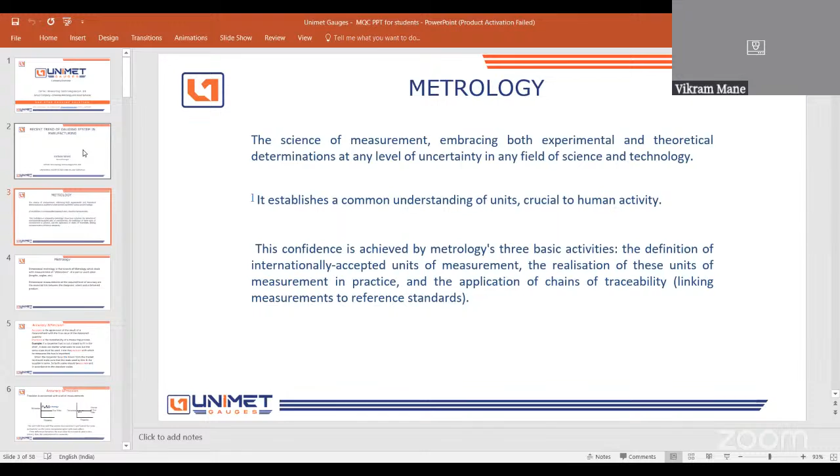Metrology and quality control. Are the students from all faculty, first year to final year, or only second year, third year, final year students audible for this PPT presentation? Because I will explain in that way, whether they are in first year, second year, third year, or final year. Most of the final year students, sir, as well as diploma and degree faculty members are also there. No issue, sir, then everybody knows the metrology science.

Now we are dealing with dimensional metrology, because there are different types of metrology fields, in various fields. That is weather metrology, you can say temperature, pressure gauges, temperature gauges, and other sensor gauges are different. Our company is especially dealing in dimensional metrology and especially in linear measurements.

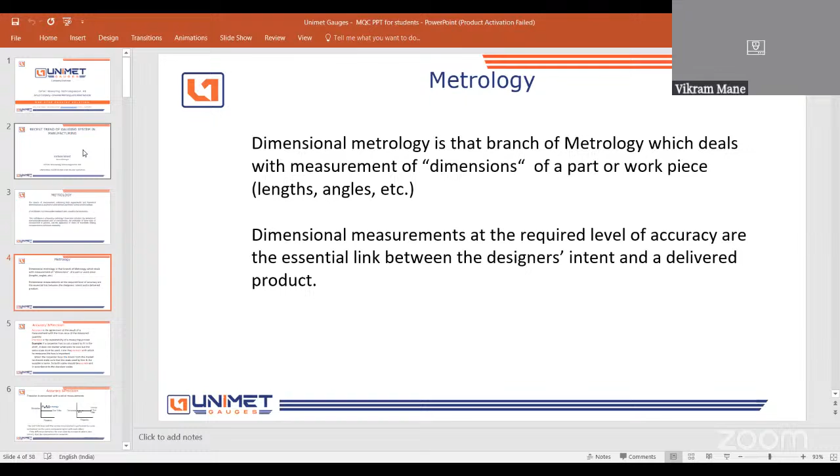Now, if we deal with metrology science, we come to the actual definition of accuracy and precision. These are basic definitions. Accuracy is the agreement of the result of a measurement with the true value of the measured quantity. And precision is the repeatability of a measuring process.

What is accuracy? What is precision? We come across precision manufacturing components everywhere. All companies write on their boards or in their company names that they do precision component manufacturing. So what is precision and what is accuracy?

There is a slight difference, and we should know the basic things. Accuracy is nothing but the agreement of the result of measurement with the true value of the measured quantity. Precision is nothing but the repeatability of the measuring process, meaning repeatability of gauges, measuring scales, verniers, or micrometers. That is called precision. Accuracy is some value along with agreements which are accepted worldwide.

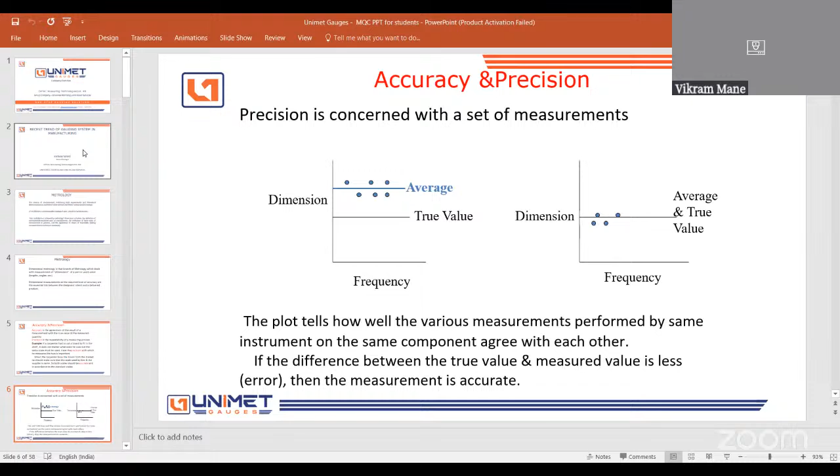Now you have to define which instrument gives you precision values, and whether repeatability is good for that instrument or gauging device, such as your scale or vernier calipers. You have to take that call for your instrument or measuring process.

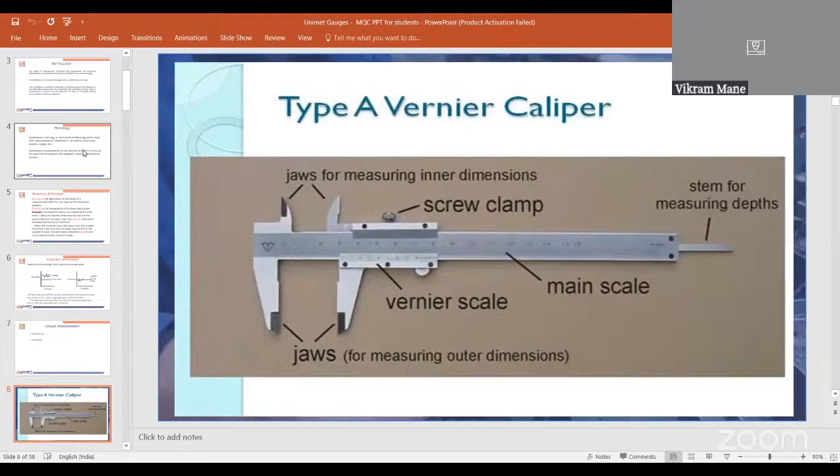These are the basic tools. We are all familiar with the vernier caliper and micrometers for linear measurements. I have included diagrams here which we are all familiar with.

From these conventional gauges, vernier calipers and micrometers, for mass production or batch production, to avoid long checking cycle times and minimize inspection time, some gauges were introduced in the quality control or inspection department. These are correlated with the first principle gauges, that is the vernier caliper, micrometer, and height gauges.

Through correlation with these conventional gauges, other types of gauges were designed, such as go gauges, no-go gauges, plain gauges, and thread plug gauges. These are the different types of gauges, and I have shown pictures here.

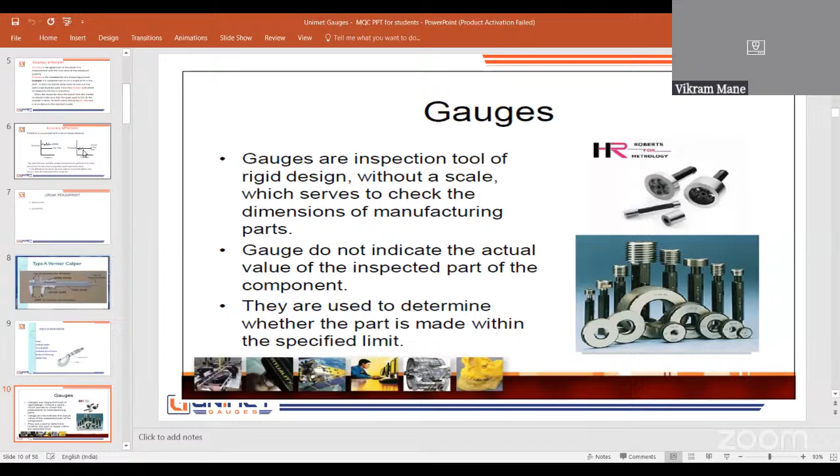That is the plain plug gauge. Here there are two pictures: one is the plain plug gauge, and the other is the snap and ring gauge. Through these gauges, you can handle inspection for mass production as well as job production up to tolerances of about 10 to 50 microns.

Maybe above 20 microns, because for broad tolerances—20 to 50 microns and more—you can use such plain plug gauges and snap gauges. You cannot observe any readings here; one end is the go side and the other is the no-go side. These are the conventional gauges.

This is the tolerance incorporated for the go and no-go gauges. There are unilateral as well as bilateral tolerances. Unilateral, which you are already familiar with, is only on one side, while bilateral means tolerances are applied on both sides of the gauge.

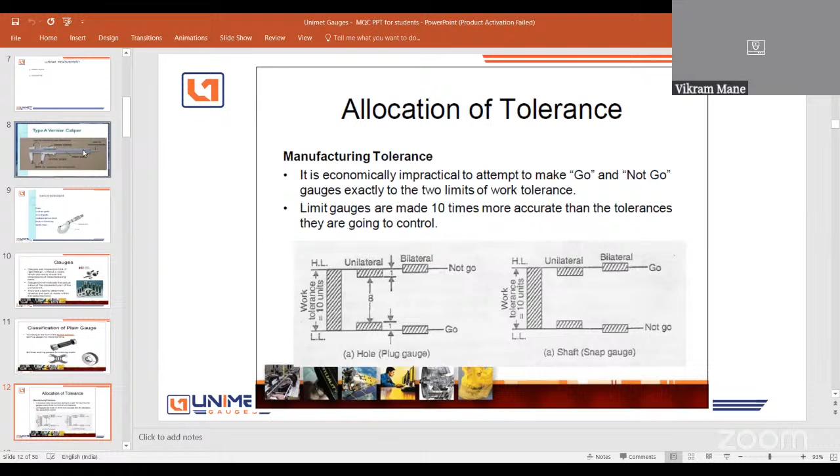Now let's come to some advanced techniques introduced over the last 25 years or so: air gauges. How does an air gauge work? It is a non-contact type of measuring method, introduced in the market more than 80 years ago, but in India we have been using it only for the last 25 to 30 years.

This concept of air gauging is based on the law of physics stating that flow and pressure are directly proportional to clearance and react inversely to each other. The measurement values appear on the dial gauge, either in analog or digital form, based on this physics: the fluid or air flow is directly proportional to the pressure and its clearance.

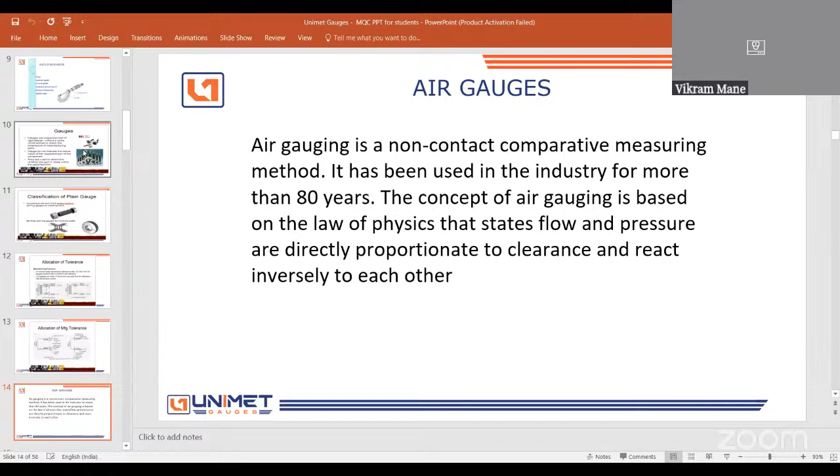Again there is clearance provided. That clearance is near about 20 to 30 microns, as per the different design parameters from different companies.

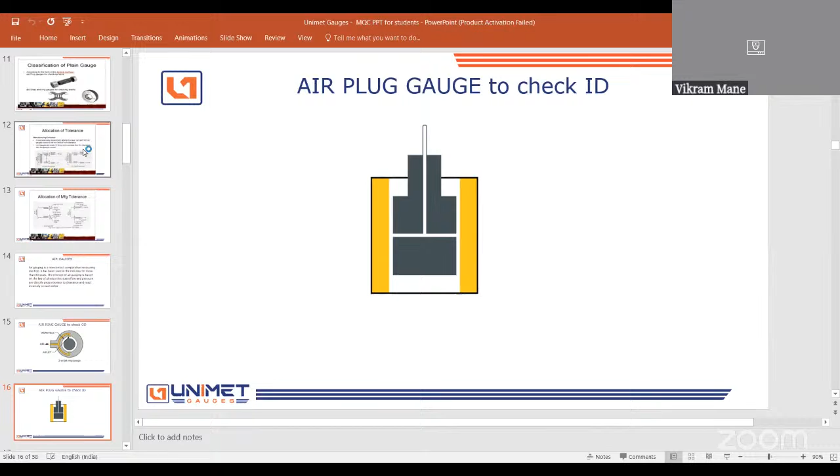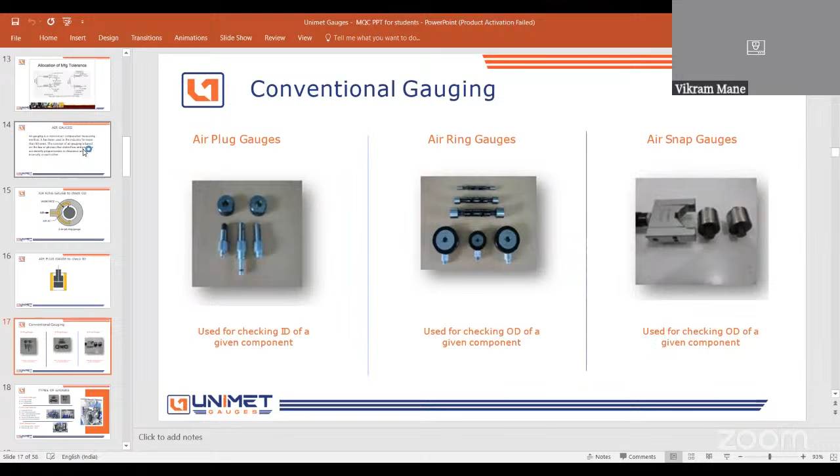Now this is the actual picture of the gauges - air plug gauges, then air ring gauges and air snap gauges. With these air plug gauges you can measure the ID. You can measure the OD through these air ring gauges, and again you can measure the outer diameter of the shaft through these air snap gauges.

Now these are the different types of gauges, from the conventional gauging systems, customized solutions, and latest development. Here we have already seen these conventional gauges - air ring gauges, air plug gauges, air snap gauges.

Now come to the customized solution. For the customized solution, there is again need of this Industry 4.0. For gauging fixtures, we have to design multi-gauging systems so you can measure multiple parameters in one single system. Again, there is semi-auto gauging, meaning loading and unloading by manual process or maybe through gantry or robot. Again, auto gauging, loading and unloading through robots and gantry.

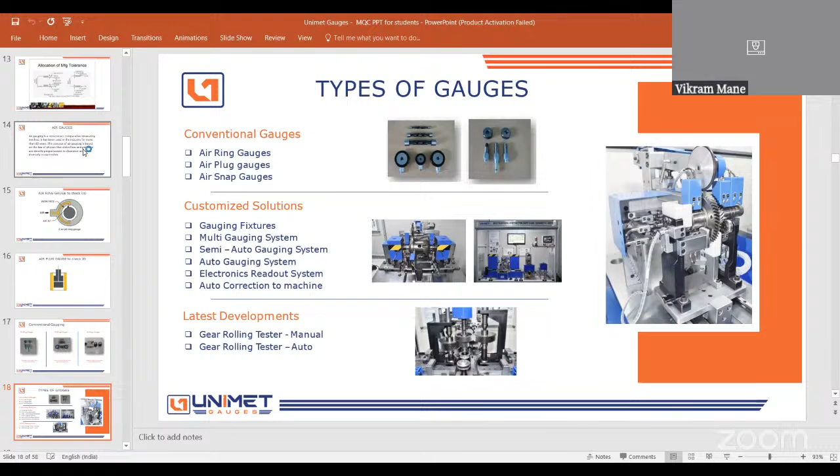And there are some electronic readout systems, then auto correction to machines also. And the development in the recent trend is again GRT, that is the gear roll testers. Maybe manual and auto gear roll testers are there to check the profile of the gear teeth.

Now, each and every problem creates some revolution in the global society, or maybe as per the need of the manufacturing market. Due to this main problem of the manpower, that skilled manpower, and to cut the cost of the manpower, this revolution comes into the picture across the whole world.

And we, being the dream of our Prime Minister, Sri Mr. Modi sir, this Industry 4.0 is now going to be compulsory for each and every manufacturer. Unless and until any manufacturer doesn't have the facility of this Industry 4.0, they are not considered for the global platform. That is why India is going to become a manufacturer hub, auto manufacturer hub for the whole world.

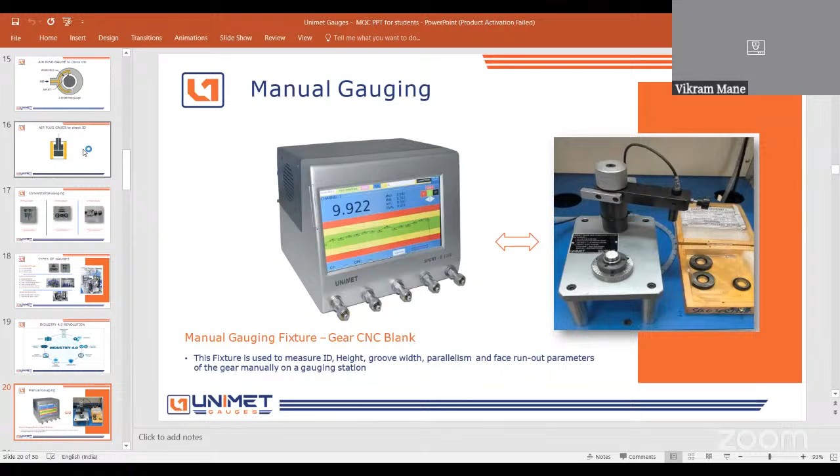Just a minute, sir. If you press shift and F5, it will get full screen, sir. One second, sir. Okay, yeah, it's fine, sir. Okay, thank you, sir.

Now comes to this gauging field again. Up till now we have gone through these conventional gauges, that is the go gauge, no-go gauge, air plug gauge, along with analog or dial type gauges.

Now comes the electronic type of gauging units. These units along with one gauging fixture are there. This is one simple example of Industry 4.0.

Now these units here, you will get the SPC. This unit is based on the SPC software. Again, you will get the real-time data of this gauging data on this unit.

There are three bands: green, yellow, and red. If your production is going on within the tolerance band, there are different settings. Suppose plus or minus 10 micron is your tolerance, if you want to set your green band, that is within 5 plus or minus micron band.

Now, if you check in components, these 4-5 ports are for air or maybe for contact type inputs. This is the 5-channel unit, 5 input unit. Here, if that production is within tolerance of 5 microns plus or minus, it will reflect this graph.

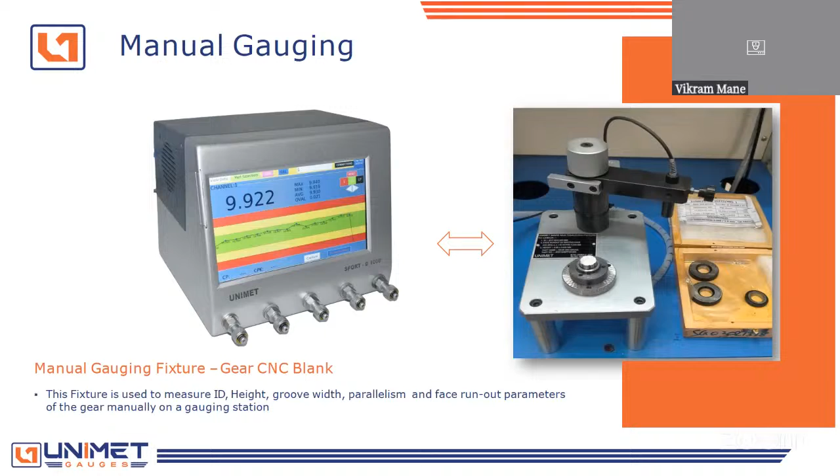Now this is the second type of unit. As compared to cost, it is an economical cost solution for the manufacturers.

This is the microprocessor based unit. This shows the gauging value through this digital readout unit.

If the values are within tolerance limit, you will get the green reading, and if the measuring values are more than the tolerance values, then you will get the red - red digital digits. Here there is a facility for green and red digit readings.

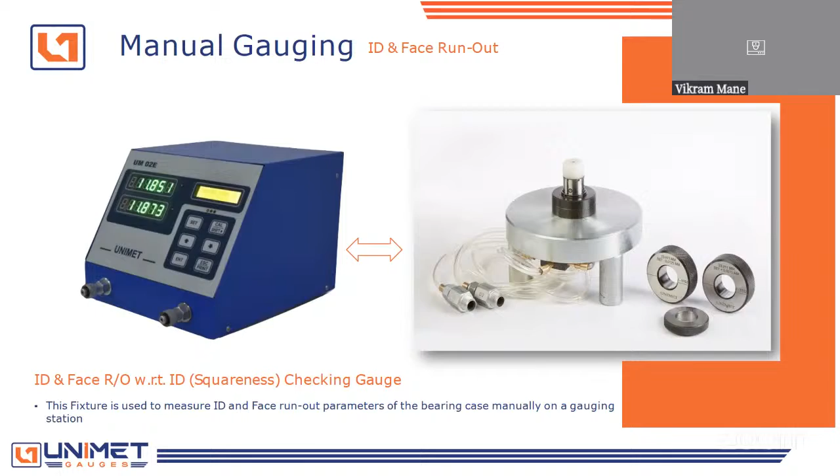Now after these simple digital solutions, you come to the advanced types of gauging systems, that is multi-gauging and auto gauging systems. Now what is multi-gauging?

You can check 2, 3, 4, 5 up to 40 or 50, up to 100 parameters or dimensions at one time. More than 2 parameters in multi-gauging you can cover within a single stroke, and within 50 to 55 seconds you can check all these 100 parameters or 50 parameters.

You can save the time for inspection, around 1/10 - 10 times manual time you can save through these machines, and you can save 10 persons through one gauging machine. This is the real benefit of the machines.

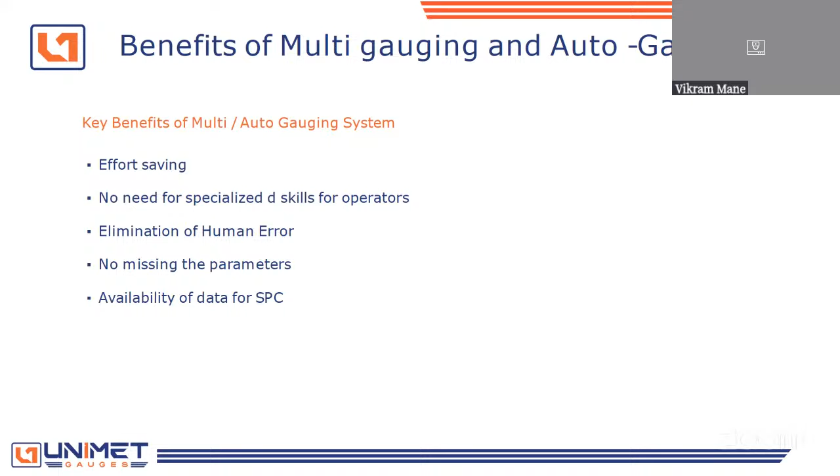Then elimination of human error - the machine always tells the truth, and you cannot miss any parameters. All this data, these machines save at the server or in the computer or CPU. All the gauging data you will get per shift, or as per the number of components checked per shift or per day.

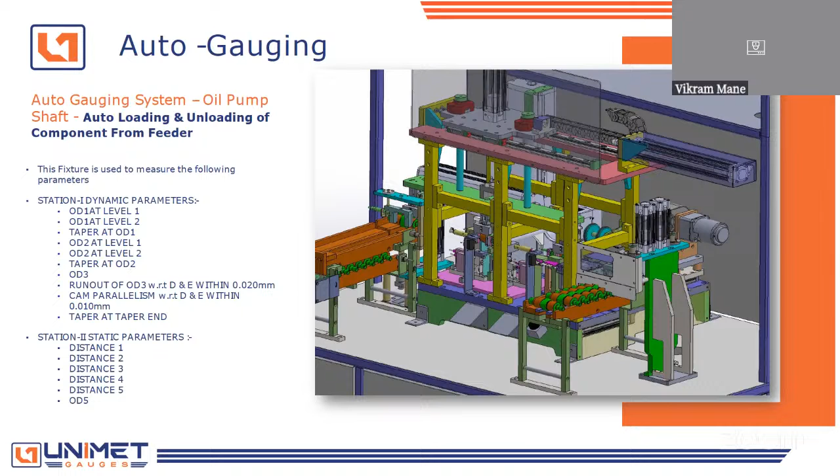Now this is the layout of some gauging machines. This machine is made to measure the oil pump shaft dimensions. If you observe, you can measure near about 18 to 20 parameters in a single stroke. This is the actual machine.

I will show the videos of this after completion of this presentation. The oil pump shafts move on this base conveyor, then go to gauging stations, and all the parameters are recorded and stored in the computer, showing readings of whether it is okay or not. This is the actual machine again for the oil pump shaft.

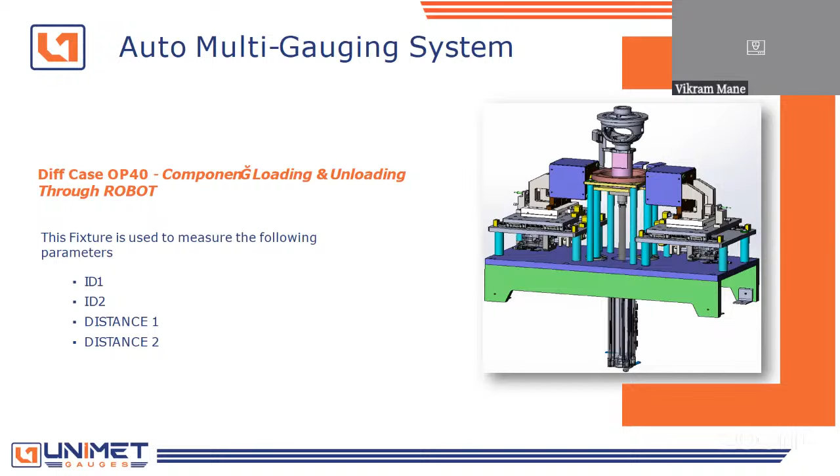This is the second component, the differential case, or differential cage you can say. Here you can measure the ID of both levels and distances of the different levels with respect to its bottom. This is the actual machine.

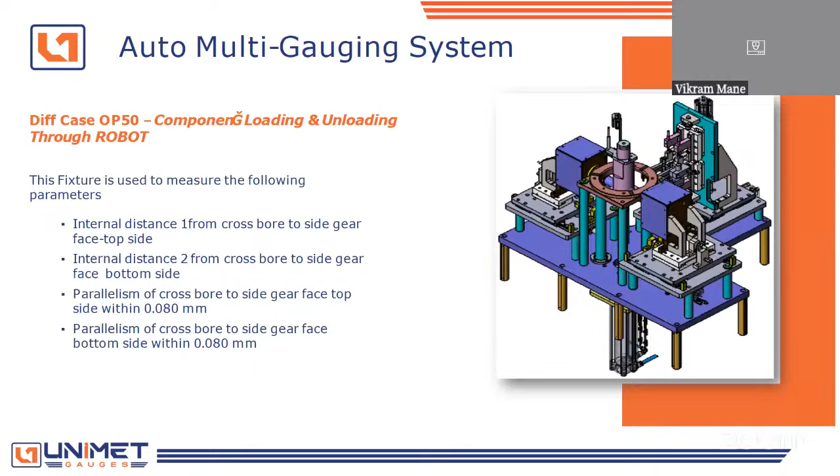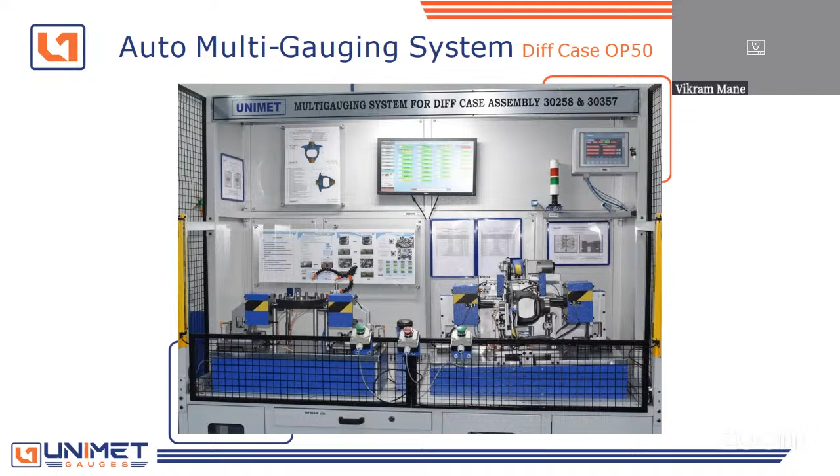Again, this is the differential case multi-gauging system. This is the horizontal type fixture; earlier it was vertical type. Now you will get the computer screen here, gauging fixture.

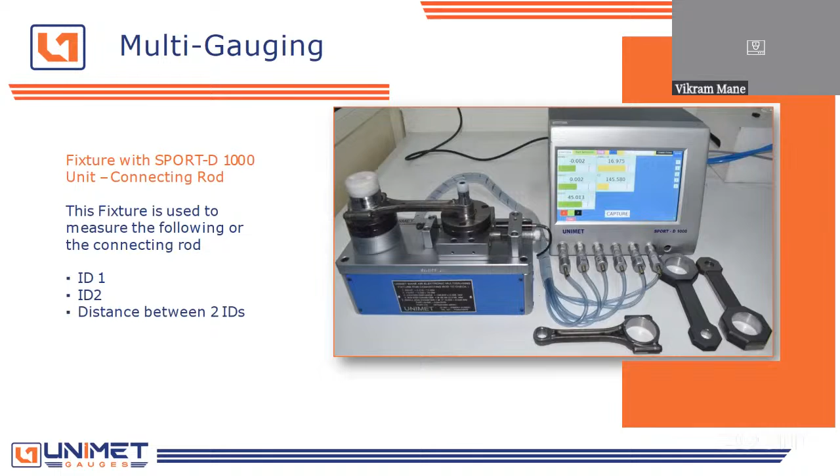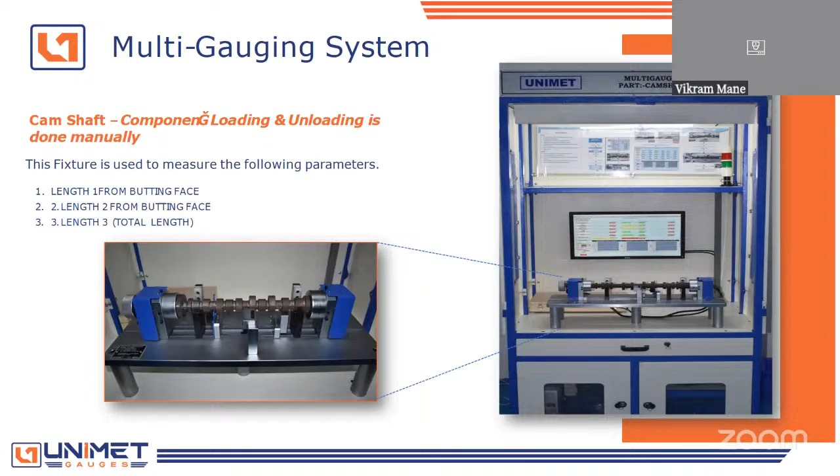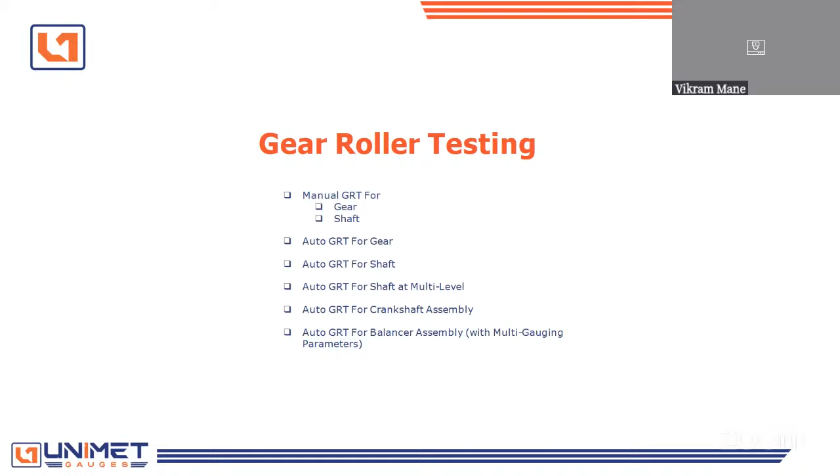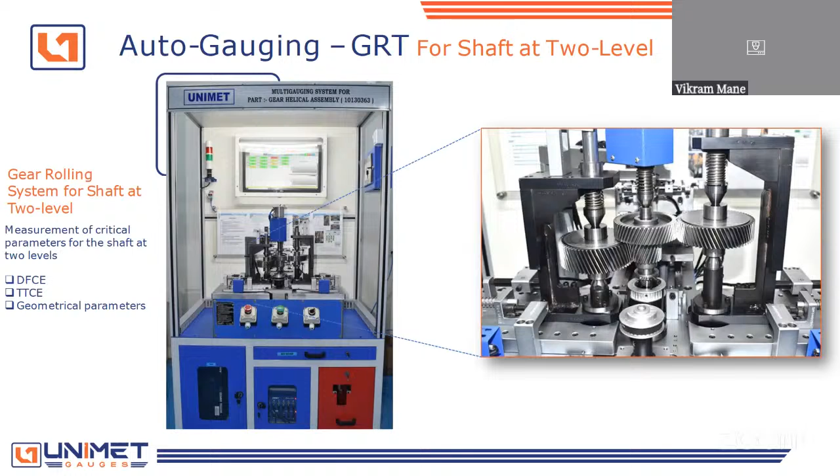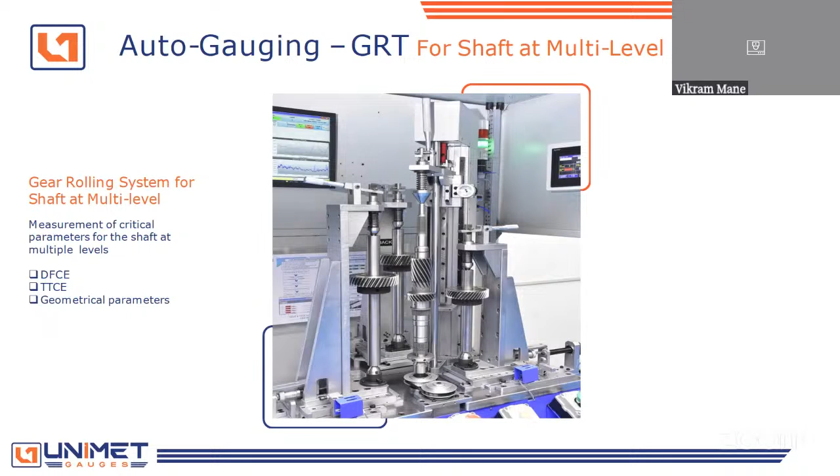Now these are the gear roller testers to check the gear parameters, that is DFCE, TTCE - double flank composite error, tooth to tooth error, composite error. Now this is the auto GRT system. Here you can check the gear parameters - two gear parameters in a single machine, and here you can check three gears' parameters through a single machine.

This is the crankshaft assembly. Again, you can check gear parameters along with shaft dimensions.

Now this is the multi-level GRT, that is gear roll tester. You can check 5 gears at a time for a single transmission shaft.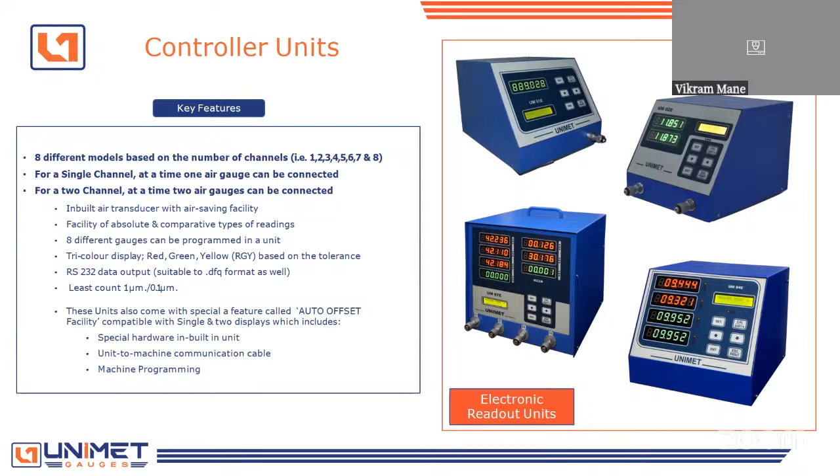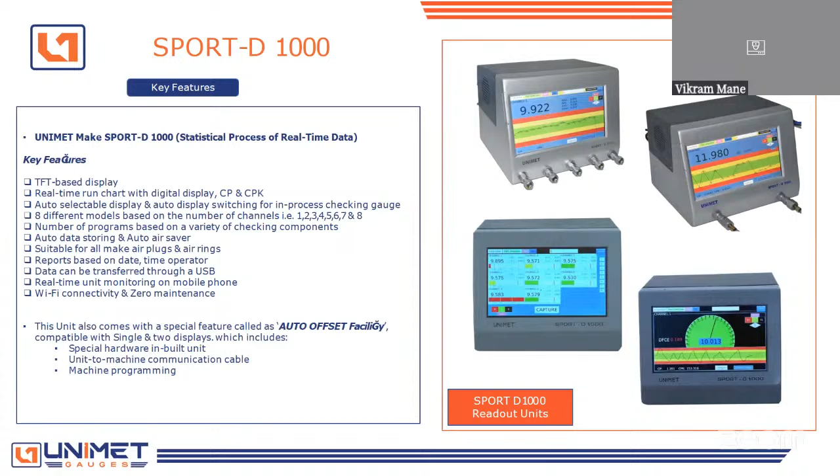Now this is the SPORT software based unit. You can observe this unit, or read this data through your mobile phone also, through Wi-Fi connectivity. Again, from single channel to 8 channel, 8 input, you can observe all these parameters in a single unit.

Now this is the remote monitoring system - data from different operations for different units you can observe or monitor from your cabin also. This is the big screen - you can set it in your cabin and observe all the shop floor data from all units on a single screen. This is the line control - different line control data you can observe from the single screen again.

Again, this is an Industry 4.0 application, that is auto correction to machines. You have to set and reset your CNC tools through this auto correction unit. To avoid manual interference, the auto correction machines, that is CNC machines, can reset your tools automatically without manual interference through this gauging unit plus auto correction unit. It corrects or resets the tools automatically through this gauging unit.

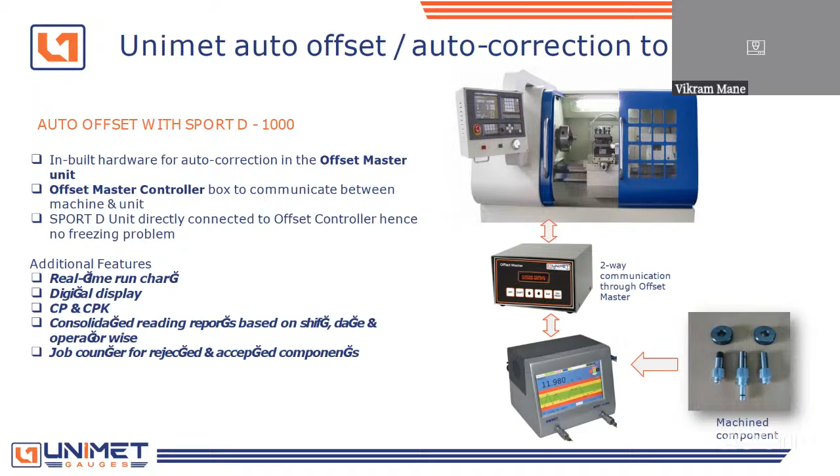This is the actual picture, and these are the specifications of this unit, that is the auto offset controller.

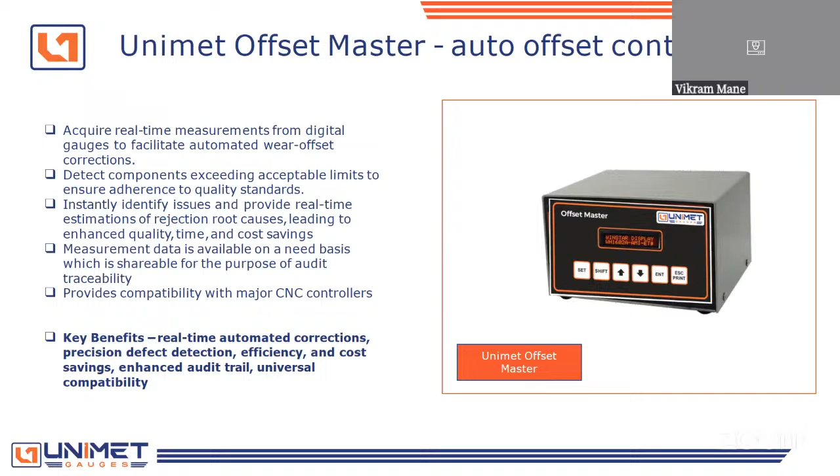Okay, we will go through some videos.

Okay, sir. Just I will show some videos, sir.

Now, I will start this video of Industry 4.0 advanced technology machines.

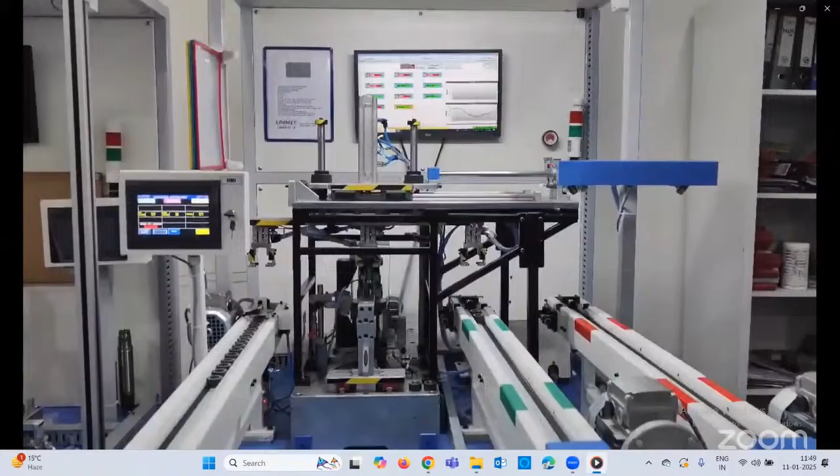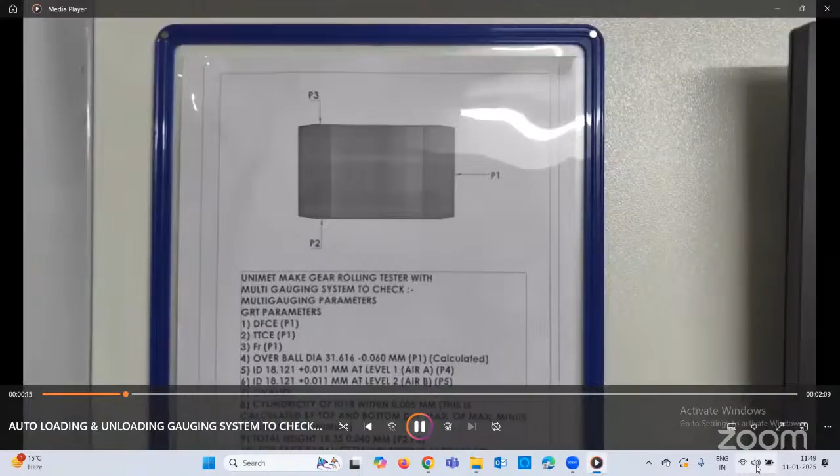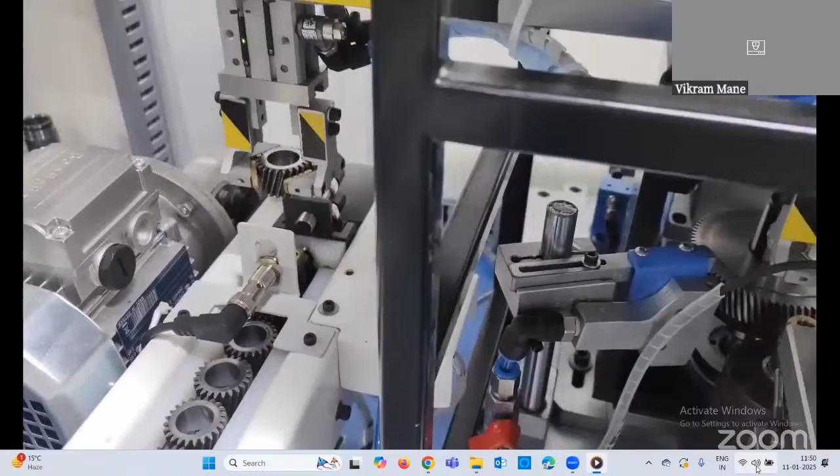Now this is to check the gears and different parameters of gears. We are given this system. This is a completely automation gauging system. The loading and unloading is through this gantry system. This total machine is designed in-house, along with all software, electronics, hardware, and mechanical components.

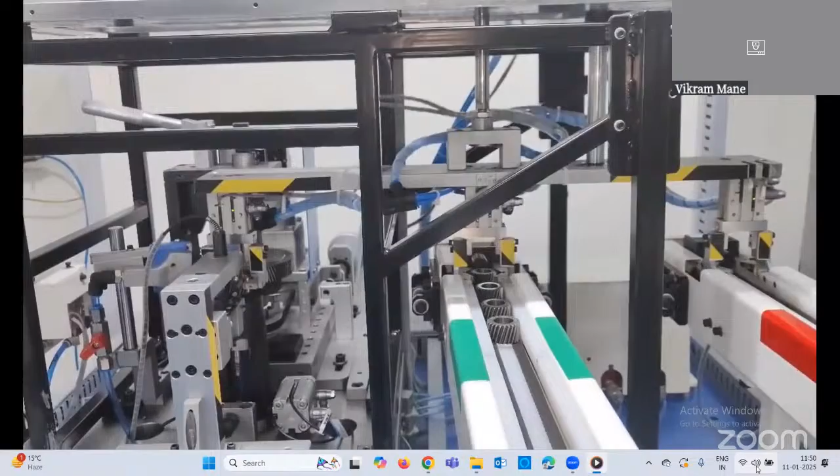There are two conveyors. One is green color for the OK components. One is the gauging station, another conveyor is for the OK components, and the red band is for not OK components.

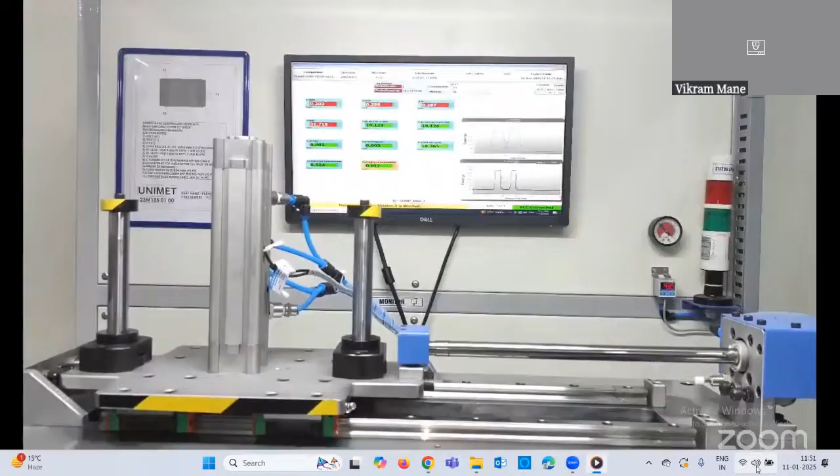How many parameters does it check? Here we are checking about 6 parameters: ID, OD, width, face run-out, and PCD, the pitch circle diameter of this component.

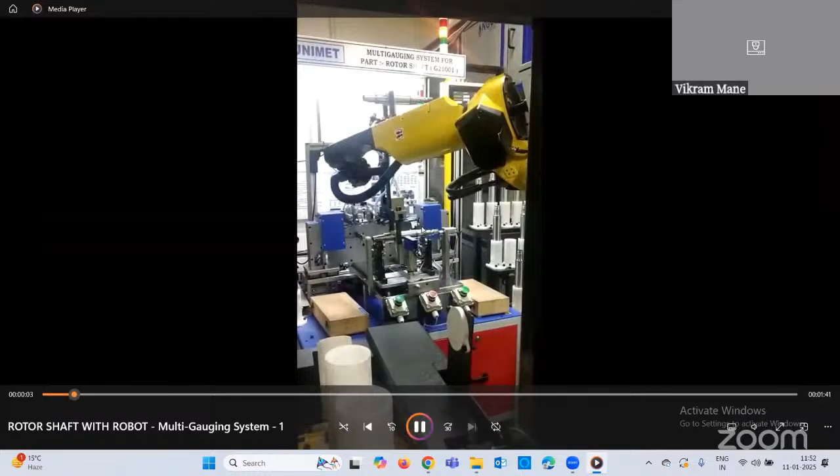Now I will show another video. Can you observe this video? This is the robot integration system.

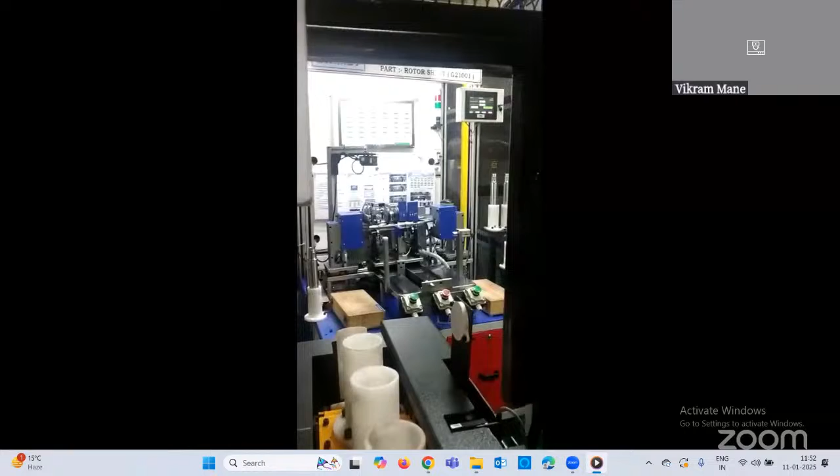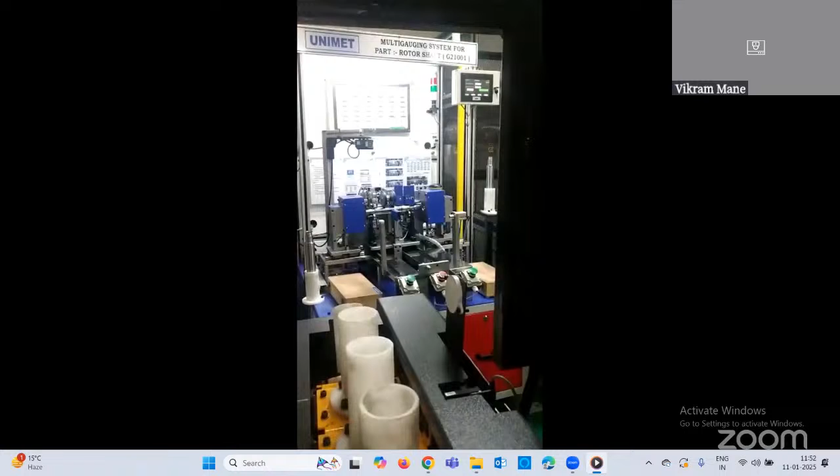Again, fully automation system. We started from the conventional gauging systems, that is vernier calipers and micrometers, and we have reached this Industry 4.0. Full automation is needed here without any manual interference. Every dimension checking is done through automation only.

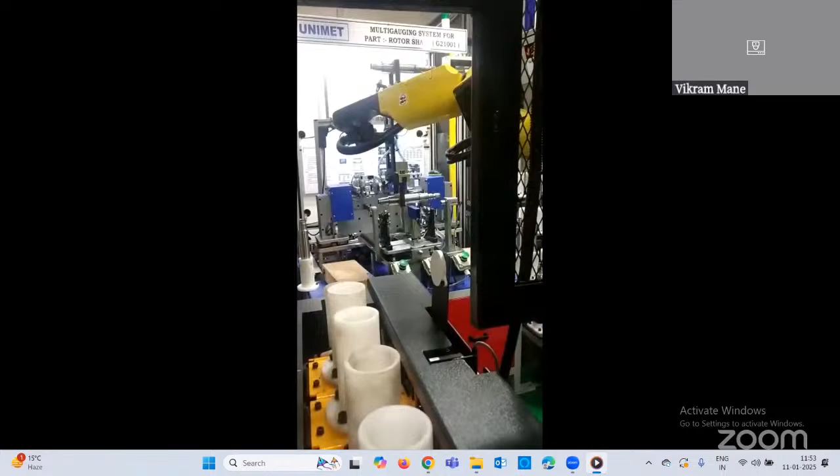Loading and unloading is through the robots, and the robot will keep the OK component in the OK bin and the not OK component in the rejection bin. Now another component will be loaded here.

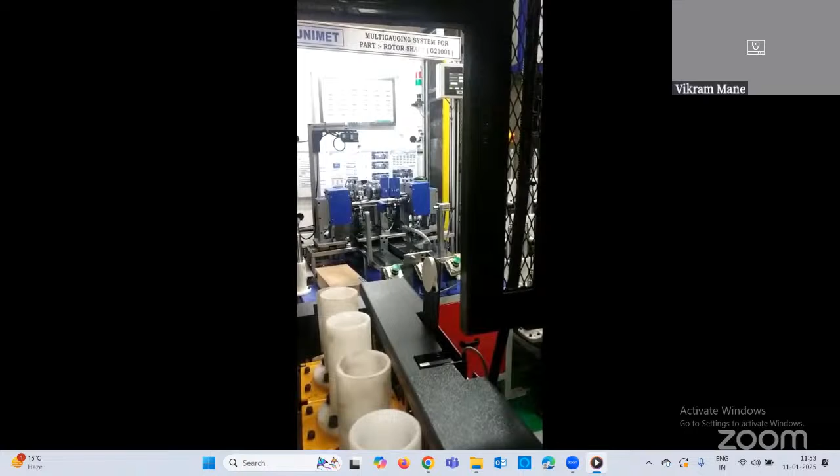After the completion of inspection, there will be laser marking. If the component is okay, through this laser marking there will be creation of a QR code, and against that QR code, the PC will store the data of that component.

So when this shaft goes for assembly, for the final inspection through the scanner, you can observe the total dimensional parameters of this shaft to see whether it is suitable for assembly or not, and all the data can be accessed through this QR code at any place in the world.

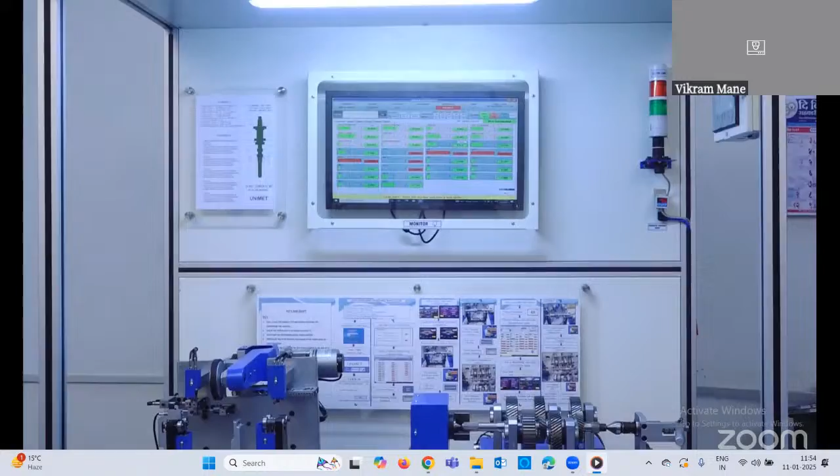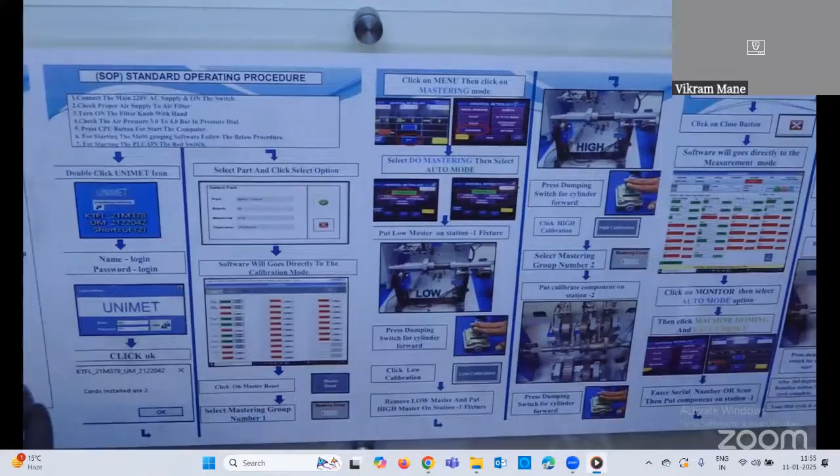Now here you can check the different parameters of the gears. There is one shaft and others are masters. This is the transmission shaft. There are 5 gears on this shaft. Within 50 to 55 seconds, this cycle is needed for the inspection.

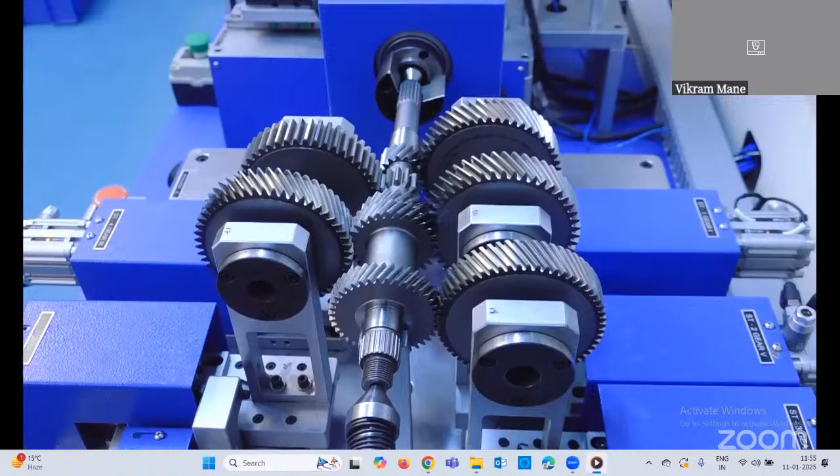Now, all 5 master components, the gear master components, we have to check all the gear parameters with correlation to these master components, whether their teeth are matching their profile with these masters or not. See how many parameters you have to check within a single stroke.

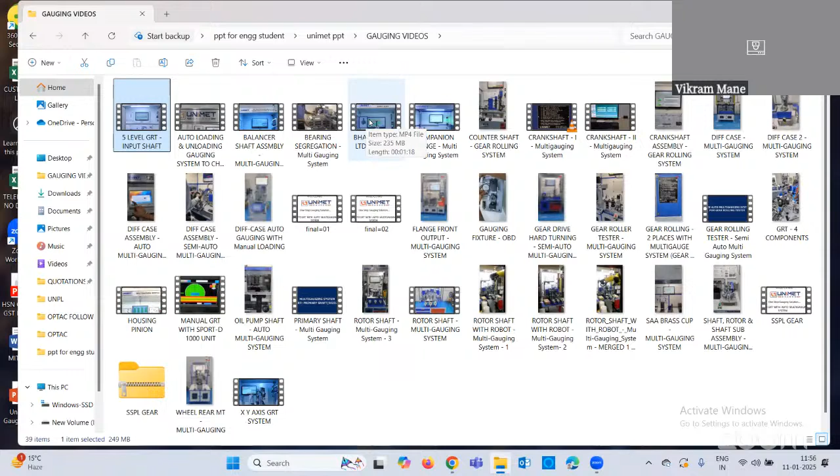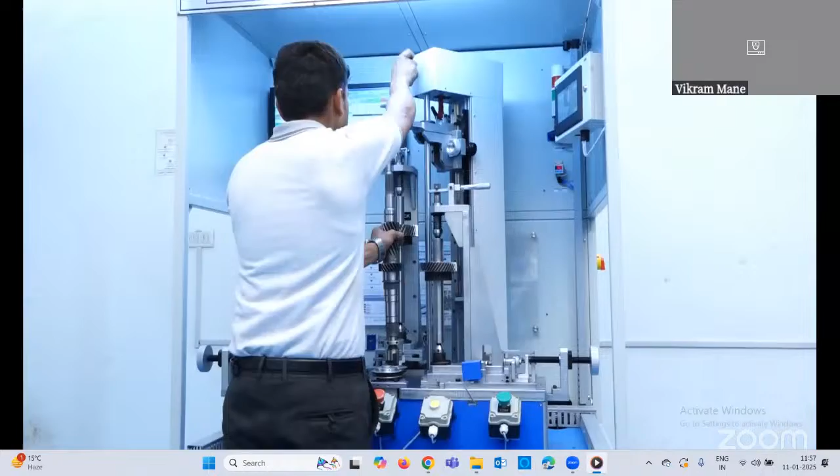Again, this is the vertical mounting machine, that is the vertical axis machine. Here you are going to check 3 gear components. If any dent or burr is found on the teeth, you will get that variation in the profile.

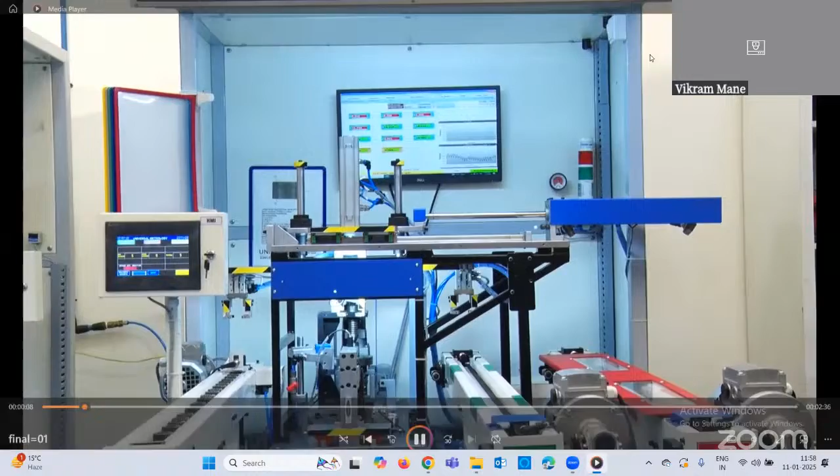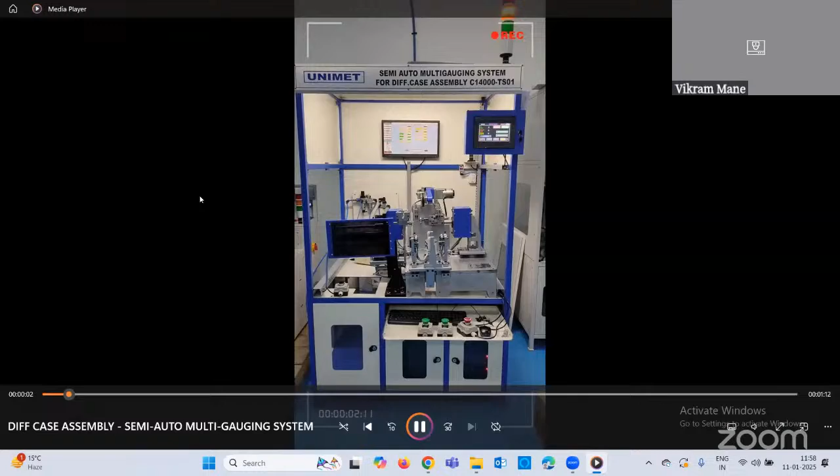This video already completed, sorry. This is the differential case multi-gauging system.

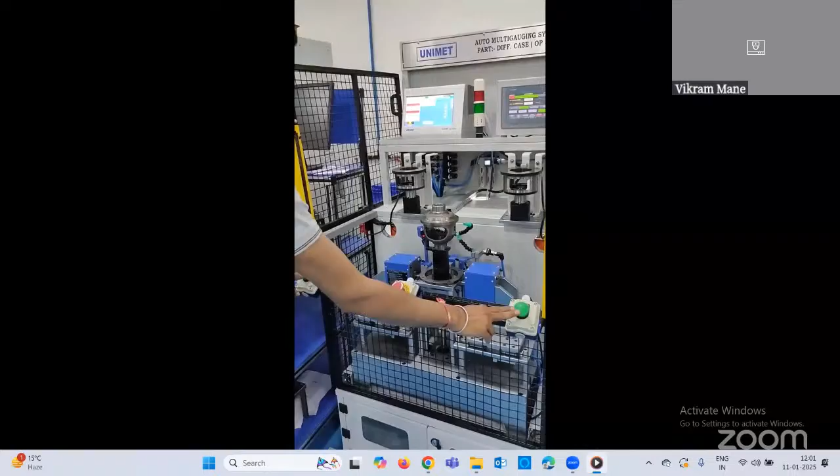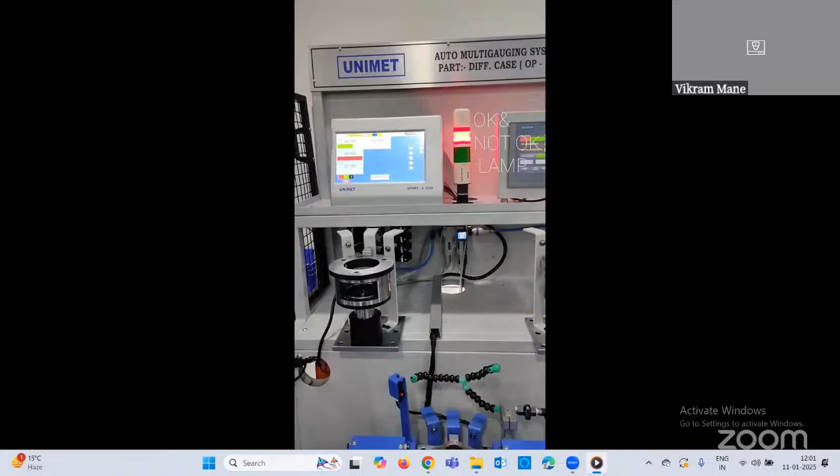This is the recent trend, sir, because all the students and we should be aware what is Industry 4.0. Everything is upgraded now, and these things are coming into manufacturing. Automation comes into the picture, and integration of all the data, administrative, manufacturing, everything you get on a single platform. This is the recent trend in gauging systems. I have shown this video for that purpose only.